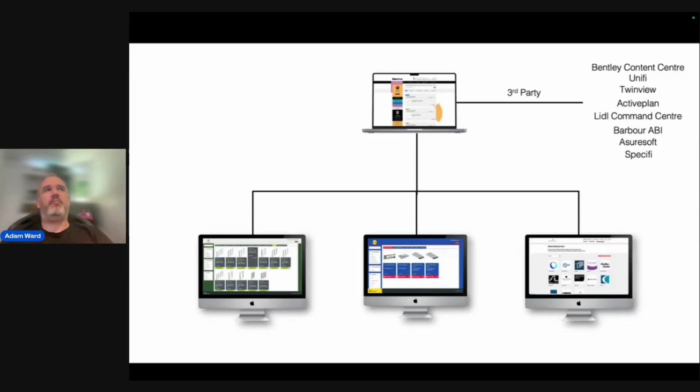We also distribute your content not just on our platform, but push it into other places such as Bentley, Unifi, TwinView, ActivePlan, etc. So we're a distribution platform for manufacturers' content. Update it on BIM Store, and it updates in all these places in one go.

And of course, analytics. As a manufacturer using BIM Store, you get access to all sorts of analytics about who's downloading your objects, search terms, and data about how your products are getting specified. So that's enough about BIM Store.

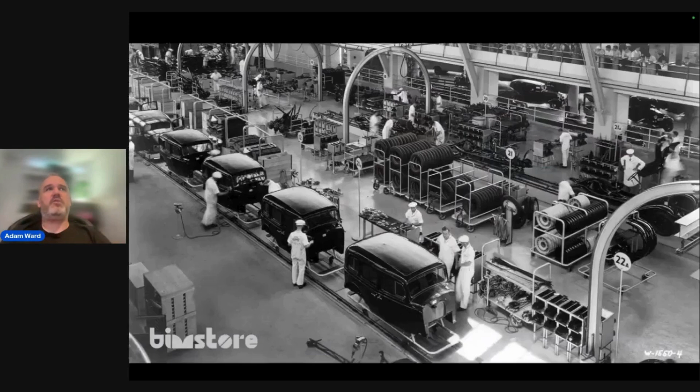I'm now going to move sideways and look at other industries. I'm going to use a couple of clichés here, and I apologize for that in advance, but it's a really good analogy. I think what I'm going to show you at the end of this presentation will circle full back to what I'm about to show you now.

This is the Ford production line, one of the first cars coming off the production line. You can see it's quite automated, well, not automated, but it's the first production line facility for cars, with people building the cars on the line.

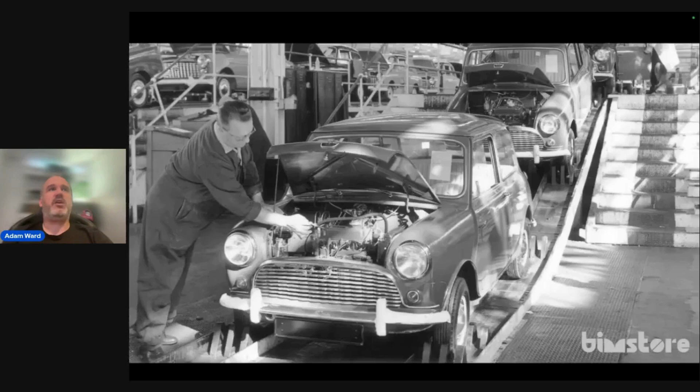This is the Mini coming off the production line back in 1960-ish, I believe, and that was high tech at the time, quite advanced. If we look at how the Mini's produced today, there's no humans on the line. It's completely computer controlled robotics.

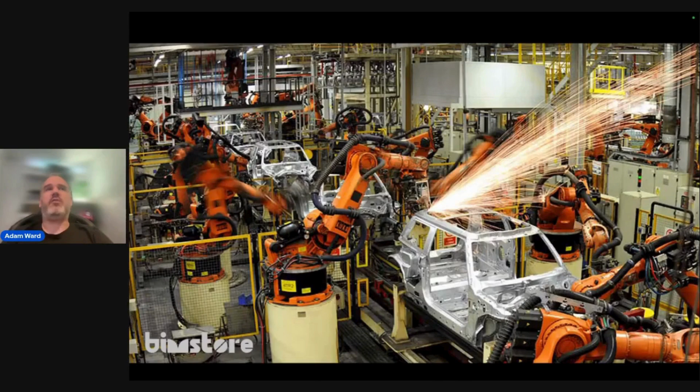Of course, you couldn't do that 20, 30, 40 years ago because you need 3D data. These robots feed off 3D data; you don't work off 2D drawings. You need 3D information to allow them to do this.

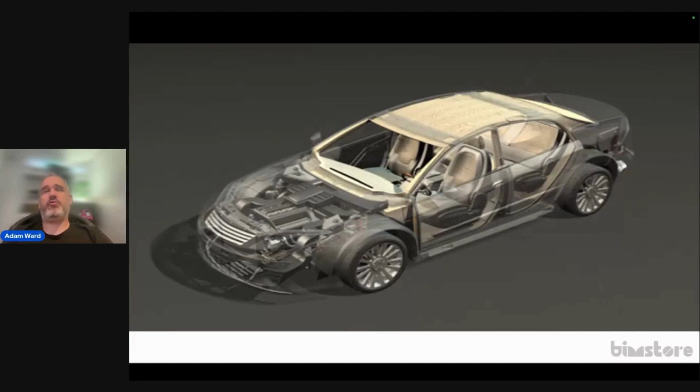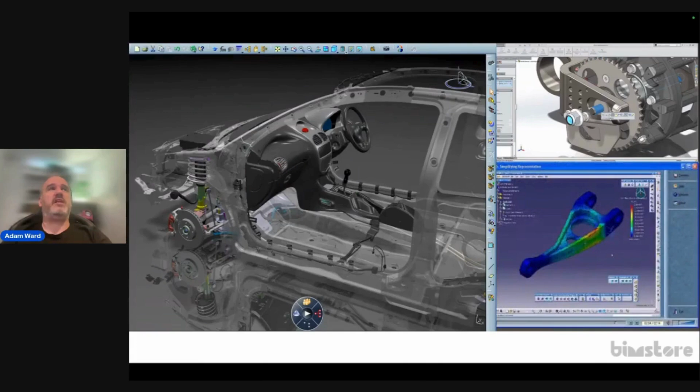We call it BIM; in other industries, they call it digital prototyping. Essentially, somebody like BMW would design a car inside a computer in a bit of software, probably CATIA, designing every nut, bolt, screw, wire, harness, and spark plug. Those parts he would get from their suppliers. So if you've got a Bosch fuel pump in there, it'll actually be that fuel pump that's put into the car to check it fits in the engine bay, and then also do other things like analysis, simulation, and crash testing.

You can crash cars virtually now instead of doing it in the real world, but also use these models for marketing and images. So the images you're seeing on the screen now from Honda are actually the digital prototype, used for fabrication, but they also use those models for advertisements and things like that. You can actually do an advert for a car before you've even built one, because of these digital prototypes, and this is an example of that.

You can have the adverts ready before they've even produced the car, technically. If you look at how cars are operated, like Teslas or any modern vehicle, those cars are sending telemetry data back to headquarters all the time - what speed you're doing, have you went over a speed bump, is there any error codes. That data is getting fed back to the mothership. For example, when I went to get my car serviced, he recommended what tyres to put on it because he analysed my driving style over the last 10,000 miles. That's the type of stuff you can do when you have this kind of connected ecosystem of data.

Oh, I'm going the wrong way.

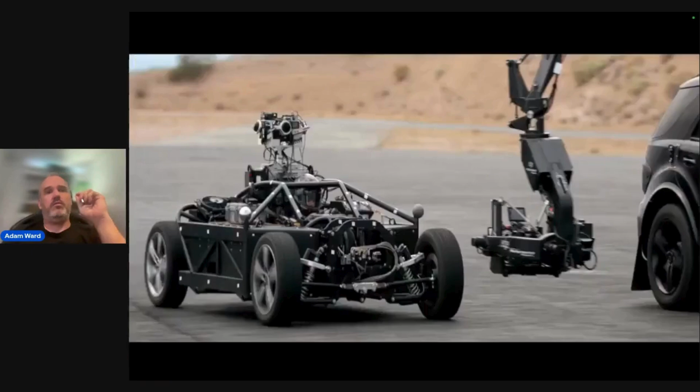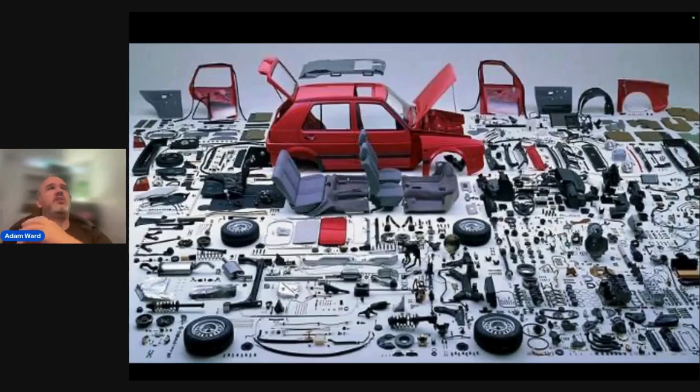And also standardization - looking at BMW Mini, same company, it's the same wheel hub on a BMW Mini as it is on a 1 Series BMW. So by breaking it down into a kit of parts, it's helping manufacturing processes, making it easier. You can start to see how the relationship with BIM and BIM objects comes into here. Essentially building a car as a set of parts from different manufacturers, coming together to build a vehicle. That vehicle can be simulated, tested, rendered, etc.

Another interesting fact, if we look at IKEA, you may not realize, but 75% of all renderings in an IKEA brochure are computer generated. They're not actually real images. 75% of them are computer generated because you can tweak them, you can adjust them.

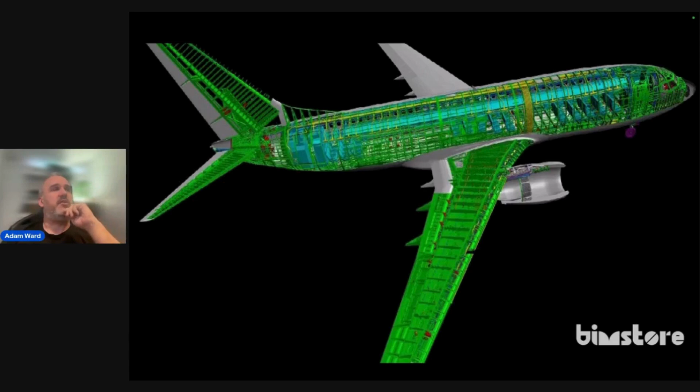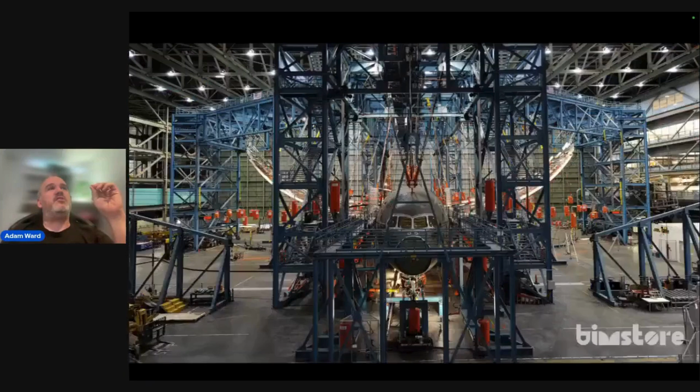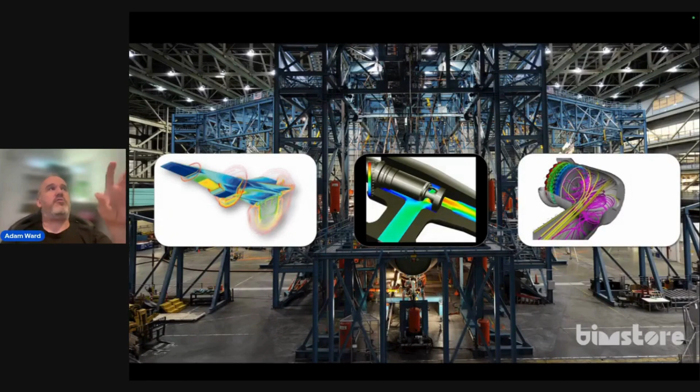So this is a Boeing production line in the factory today. I realise Boeing's probably not the best example at the moment with all the problems they've got. But essentially, this is how they used to test aeroplanes - they used to bend the wings till they snap. Now we've got the computational power and the data from all those tests to be able to do this inside the computer. So CFD simulation and finite element analysis, to understand, hey, let's not go and destroy a 300 million pound aeroplane for a test. Let's test it in a computer and maybe destroy one at the end to validate those results.

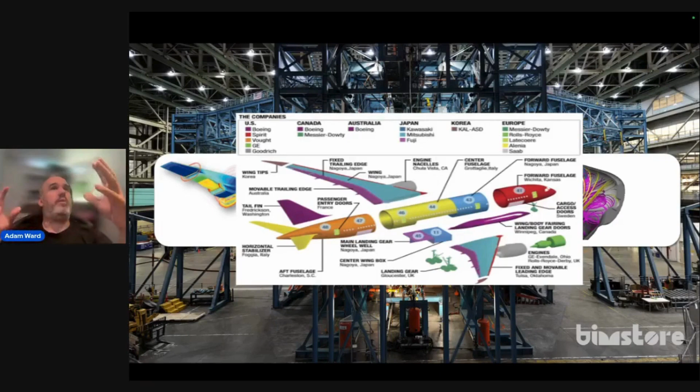And again, because we're building these planes virtually inside a computer, we can build the different parts in different parts of the world by different companies and ship them together, and they all fit together perfectly. Even though in different countries you've got different standards for things like wiring, because it's digitally prototyped in a computer, when it comes together, it all fits together perfectly.

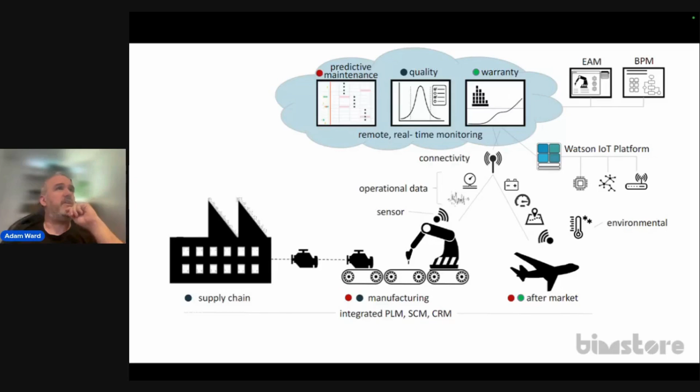And if we look at how aeroplanes are operated, aeroplanes have a highly sophisticated maintenance scheme, and it runs off a bit of software called Maximo. Essentially, every aeroplane in the sky sends telemetry data back to a data center in Birmingham, owned by Boeing. What that's doing is monitoring thousands of sensors on that aeroplane. If it finds any problems, it checks the nearest airport, checks the inventory in that airport to make sure you've got spare parts to service that plane. It'll even redirect that plane to a different airport based off who's on shift, what tools are available, and whether you have spare parts in that airport. And all this happens autonomously on the cloud without any human input. So again, really sophisticated from a PLM, facilities management perspective.

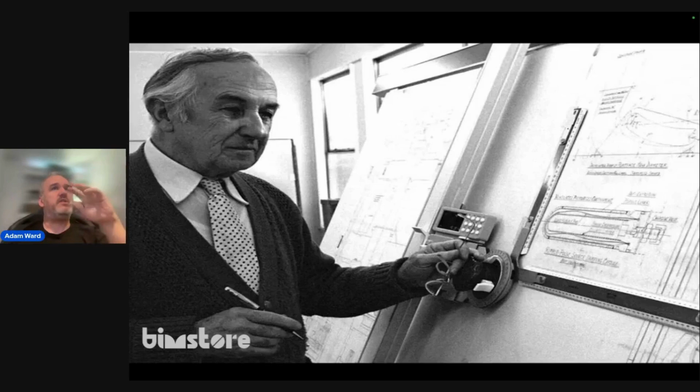Now, if we look at our industry, the construction, architecture, design, AEC industry, this is how we used to design buildings on a drawing board. Some people still do. We moved to CAD, essentially doing what we did on the drawing board, but doing it in 2D - drawing lines, arcs, and circles on a computer screen rather than on a bit of paper. A lot better because you can copy and paste, duplicate things, etc. You don't need to scratch stuff out, but essentially still a manual process. It's not intelligent. It's still 2D information on a screen.

More recently, the latest generation, we're talking about BIM. Now more architects and engineers are designing in 3D, especially for bigger, more complex buildings. We're starting to design buildings like we would design a car or an aeroplane - designing and testing them in a computer.

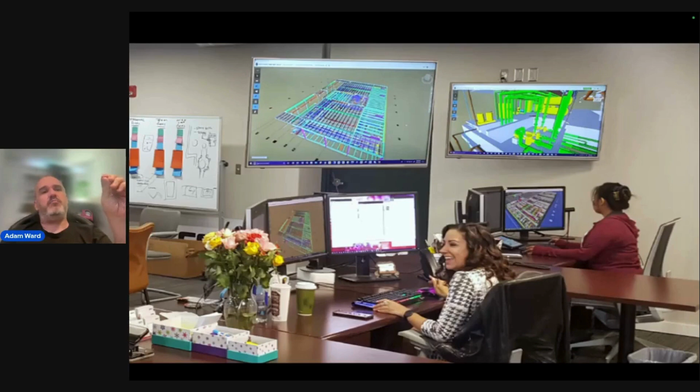If you look at the aerospace or automotive industry, they've been doing that for 20, even 30 years. Everyone thinks BIM's new, but really we're just following the trend of 3D digital prototyping. The reason is buildings are getting more complex and regulations are getting more stringent.

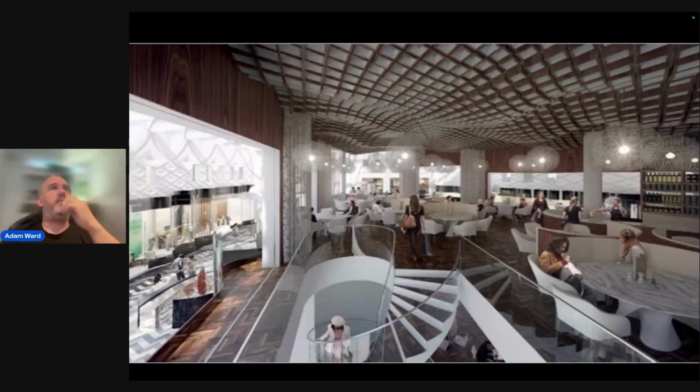This is why digital prototyping, or BIM, is becoming more common, because buildings are getting more complex. This is the inside of that building - again, the architect just went mad: let's not have any straight lines, everything curved and funky.

Even curved glass - this would be really difficult to design in 2D or traditionally, and you can see the complexity. This is the same project, Victoria Gate in Leeds, and you can see this lattice here.

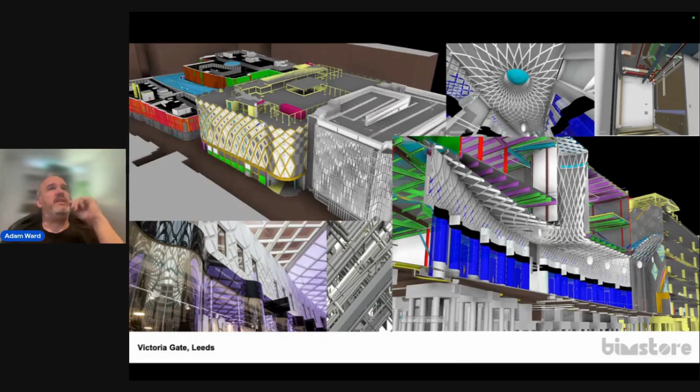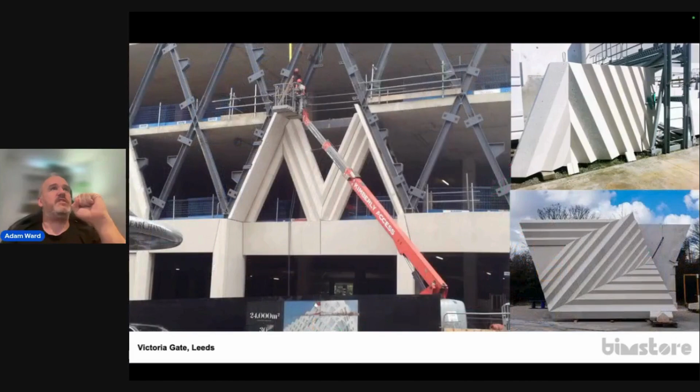Again, it's not just helping the design process, but also when it comes to construction. On site, the contractors need to make sure these things are going to fit together like Lego. For example, these concrete panels are manufactured in Amsterdam, and the steelwork manufactured in the UK in Sheffield. When they both come to site, they've got to fit together with millimeter accuracy - you can see the dowels and holes where the pegs have got to go into.

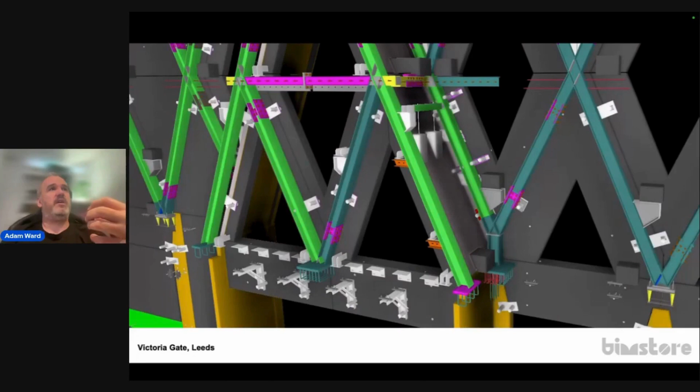Luckily, because of BIM, we can test that virtually in a computer - bring those parts together, and it fits. The drawings are produced from the BIM, so when it goes to site, it should come together perfectly. None of this is really cutting edge - this is kind of how BIM's used today, for coordination, clash detection, etc.

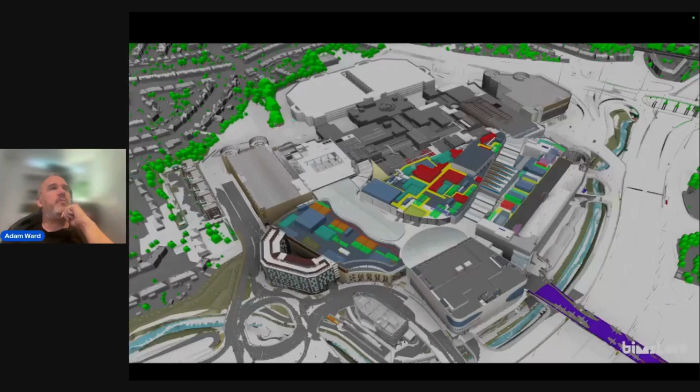4D sequencing, timelining - this is a project in Brent Cross, London shopping centre. This is the 3D rendering, but behind the scenes there's a BIM model. This is the BIM model of Brent Cross.

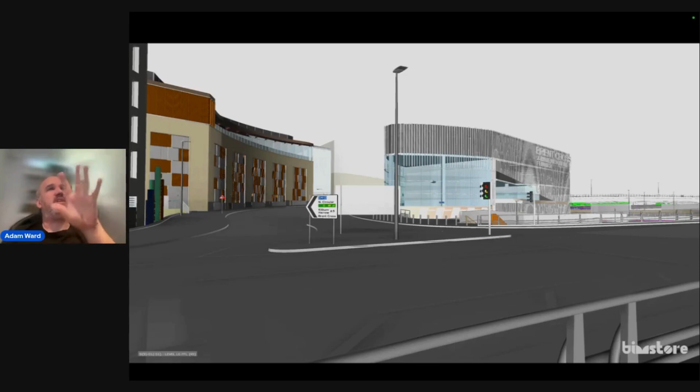And it goes right down to names on the signage - can we check that signage is clear? Can you see it from that angle? Modeling every single part of that building to make sure that it works.

This is Google's King's Cross building - again, this is the building. It's as tall as the Shard, but it's like laid on its edge in King's Cross, London. This is the BIM model inside of Autodesk Revit.

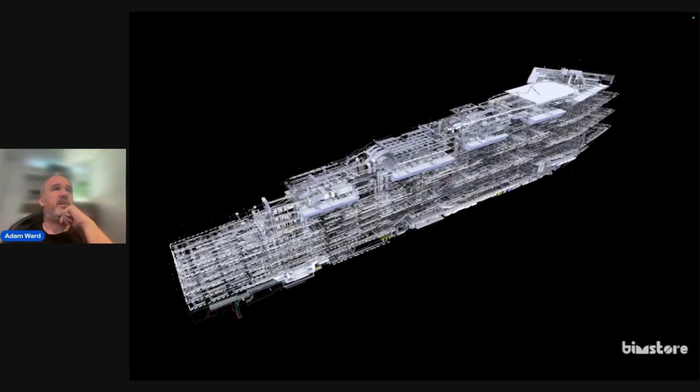You can see the structural model there, built by the structural engineer, and the mechanical model built by the MEP engineer with all the mechanical elements in it, and they all come together. This is the Coal Drops Yard - again, you can see the BIM model on here.

So BIM is used throughout the industry. It's kind of commonplace now, especially in the UK. I can't comment for Australia, but in the UK it's everyday stuff, even for small buildings. So the question is now, how as a manufacturer does this affect you?

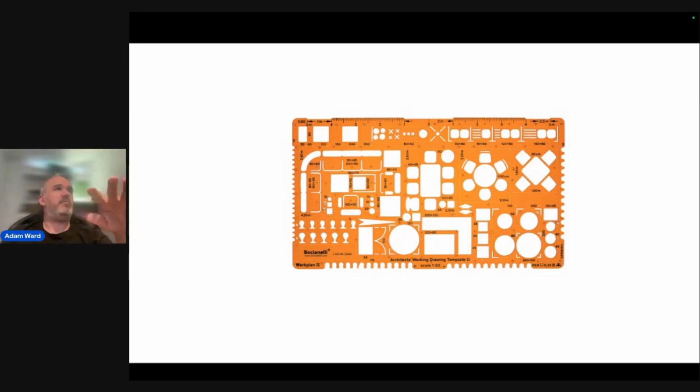In the old days, when we used to do designs in 2D, we used to use stencils. Manufacturers used to issue these stencils to people - Armitage Shanks used to send me a toilet stencil with a little template to trace around.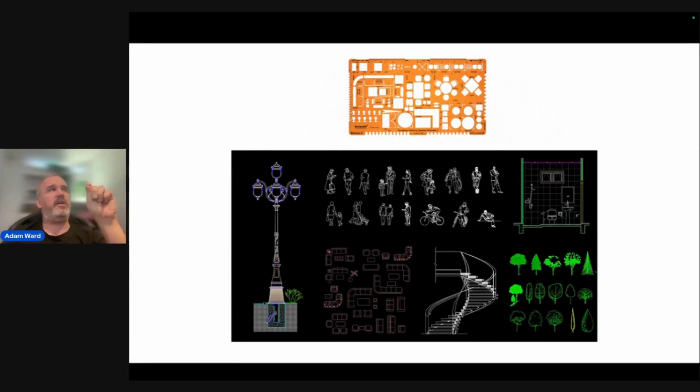Then we moved to CAD, and essentially manufacturers started giving us 2D CAD blocks. So instead of having to trace that furniture or draw that boiler into a CAD, we could just copy a block from the manufacturer and put that directly into the software.

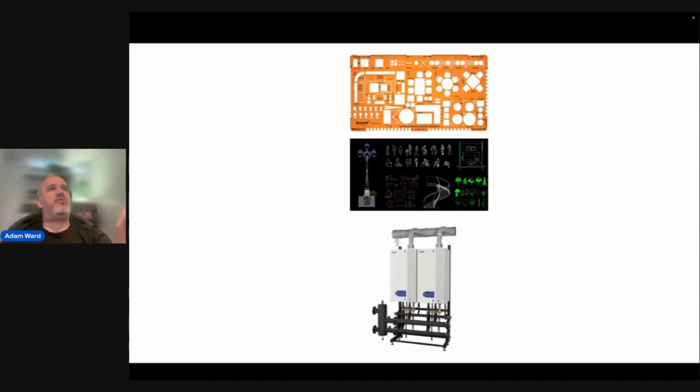With BIM, we've moved to the world of 3D, so we now have 3D BIM objects. But it's more than just a 3D object - obviously this object has data, it's got parametrics in it, so it's configurable. You can have 1 boiler, 2 boilers, different heating outputs, and when you change that, the data updates automatically.

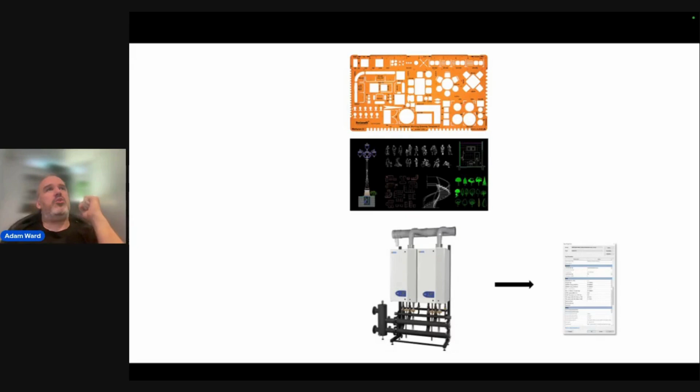But then also it can have nice-to-haves. For example, let's say the architect wants to see if the clearance zone will be achieved - you can have a little tick box to show the clearance zone.

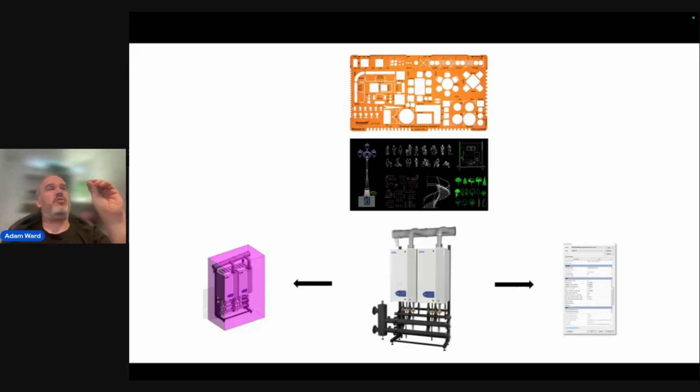As a manufacturer, architects are now expecting manufacturers to provide this content. But it's got to be good quality content, and it's got to be useful content. A 3D CAD block just loaded into a Revit file isn't good - it's got to be good quality, efficient, data-rich content.

Now, this content's also got not just the manufacturer's data, it's got heating information, energy rating, how heavy that is. And you can see on here information which is used to do analysis and calculations.

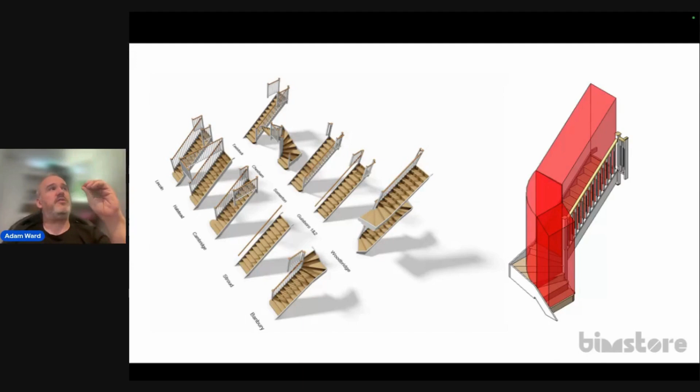You can see manufacturers are now starting to also provide libraries of content. This is a stair manufacturer, Staircraft. You can see built-in clearance zones to make sure you get the headroom. Little features which give the architect incentive to use this content.

This is a roof truss manufacturer providing Barratt Homes standard roof truss designs for all roof trusses. So some manufacturers are now starting to offer a design service in BIM, designing using the BIM software themselves and providing whole packages to contractors and architects.

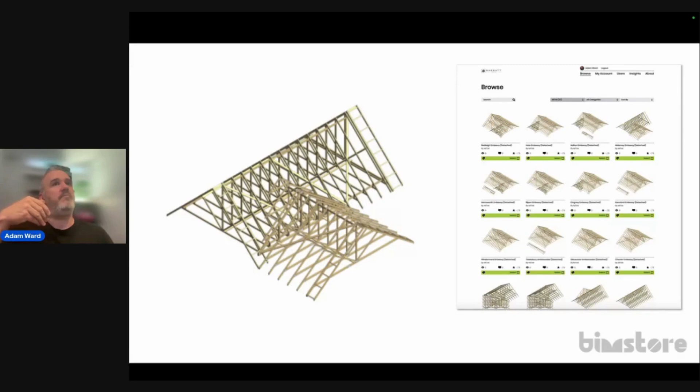For example, I've designed a house, I want a roof truss package. I wouldn't have to sit there placing each truss - manufacturers are now designing those systems. And you'll see on here another one, a library of parts.

A lot of clients, such as Bovis Homes here, who aren't architects or engineers, are now starting to provide libraries of content to their designers. So if I'm designing a new house type range for Bovis, they're giving me the bits to build their houses with, to make sure I don't go mad and specify a gold-plated light switch when they've got a supply agreement with Deta Electrical, for example. So giving architects and engineers the component parts to help build those buildings.

Barratt are doing the same. And I think what's super important here is to make sure that the content that is built is suitable for everybody across the whole life cycle of the project, all the way through from design, all the way through to operation.

If you ask an architect what data should be in a BIM object, most of them won't care about the energy, the heating capacity, the BTU rating of the boiler. They won't care. But if you ask an MEP engineer who has to do the heating calculations, he'll want that data. If you ask somebody who's operating the building, they'll want the warranty information.

So what I would say is that the myth of too much data in a BIM object is a myth - you can't have too much. It's got to be good quality to standards, but really these days with the computers and power we have, more data the better, as long as it meets industry standards.

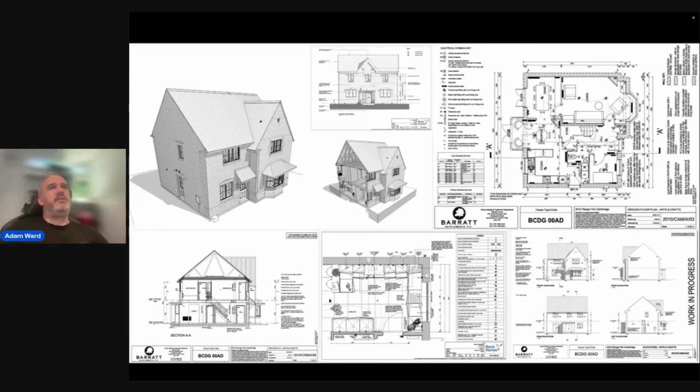Make sure you build content which is used for the whole life cycle, not just design. Again, most architects will be using these objects to build a model which produces all the drawings for them, essentially - the days of producing separate drawings are gone.

But a lot of BIM software, like Revit for example, can also do analysis. And you need to make sure when you're providing your BIM content, it contains the data to allow this to happen. So if you're building a structural beam or column in Revit, make sure it has the right material properties to allow the calculations.

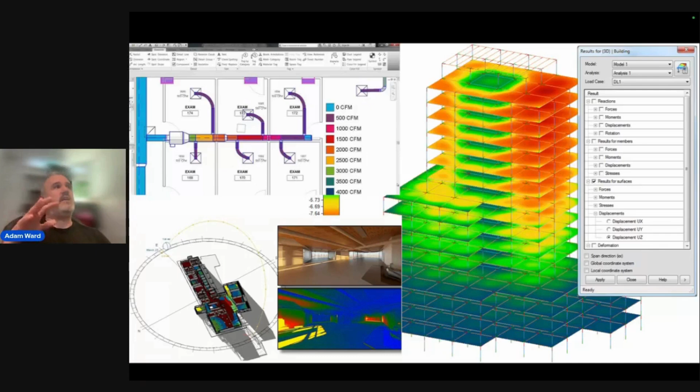Because it can do mechanical flow rates, structural analysis, lighting analysis directly in the design software as the designers are designing - but that's powered by data which is in your objects. You'll see an example of that later.

The other good example is make sure the materials are on your objects, because these are some renderings direct from BIM - these renderings have come from the BIM software itself. Again, making sure your objects have the material on and the correct information on is super important.

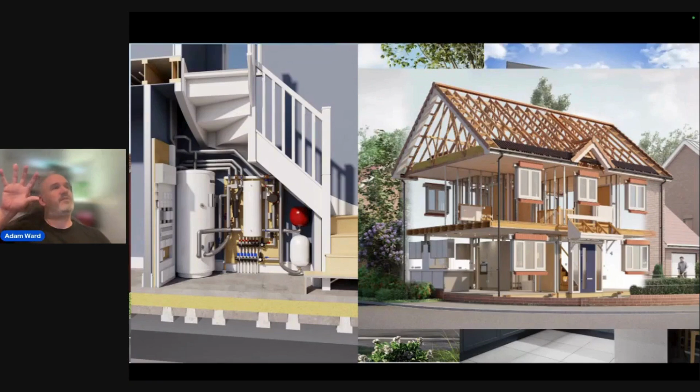This just shows it's not just a pretty box with textures on. If you actually cut a section, you're still getting all that detail, because this model is the same model which produces your 3D visualizations. So you can see the METSEC in there, you can see all the valves and bits in here. And if I clicked on one of those valves, it will have the manufacturer's name, etc.

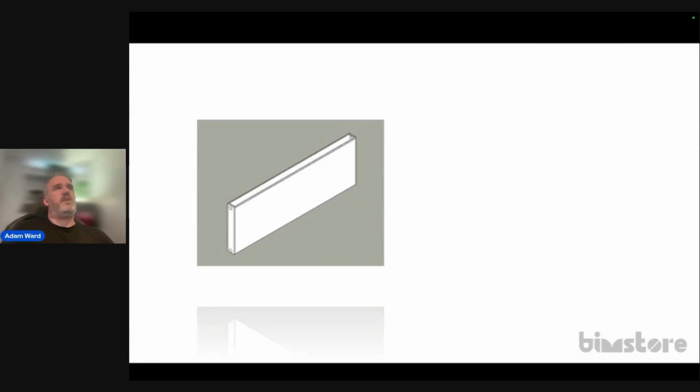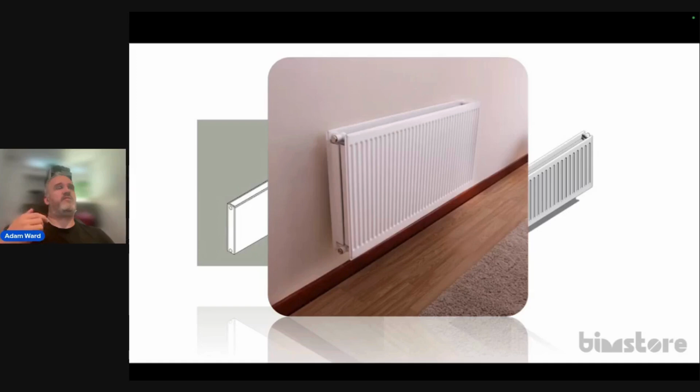So this is a BIM object. Obviously this is in low detail, you have medium detail, then you have fine detail, or LOD, level of detail. There's different levels, depending what country you're in, different standards. But make sure your content's usable for everyone, whether it's for schematic design, you just need a box, or whether it's for detailed design, or whether it's for 3D visualization. Make sure your content has all the data to allow that to happen and is built to standards.

You don't need to go too far. A lot of people say, well, do I need to model the screws and little bits and pieces on there? So I would say these days you don't.

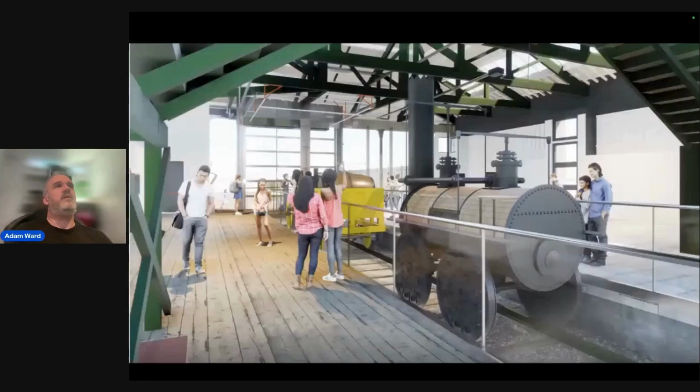Here's another example. So a really basic rendering from Revit. Again, quite bulky, quite washed out. Chucked through a machine learning algorithm, especially if you watch this guy's face here and this guy's face here and this detail up here, you'll see it kind of just adds that next level of realism.

So these days you don't really need to model every nut, bolt and screw, because that's going to kill someone's machine, but build what's appropriate to get the dimensional context across and get the information across.

Obviously, these BIM objects are then also being used in AR. So this is a project which Barratt Homes did. They built the whole house using manufacturer's BIM content, and then a competitor's house. And then at their yearly management conference, they stuck headsets on everyone and said, hey, go and walk around one of our products, one of our houses, go and walk around one of our competitors and do a checklist about why we're better than our competition.

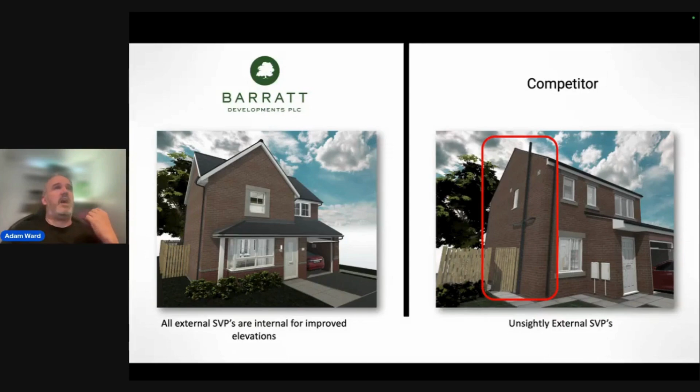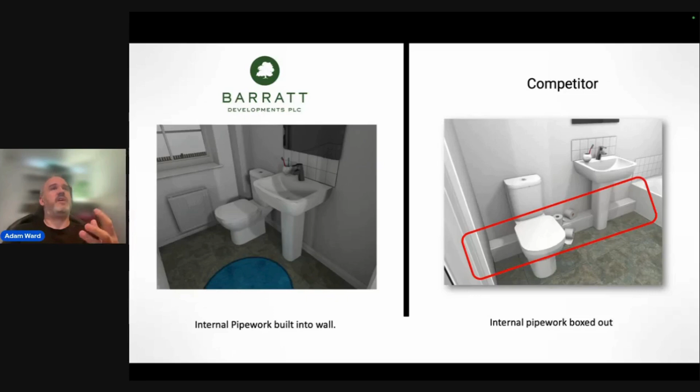So we developed this app for them, BIM Store, which allowed them to do that. And essentially, you could go through using AR or virtual reality with a VR headset and basically spot where the difference is. You can fit a car in the garage, you can't fit it in the other one. Stuff like thinking about furniture locations, etc. So again, VR, once you've got the data with the materials, with the models, this stuff kind of is like a freebie, for want of a better word.

A lot of clients are asking for BIM. So a lot of reason people are doing BIM is because the client's saying, I mandate BIM, I want BIM on this project. And the reason for that is at the end of construction, that BIM model and its data gets handed over to the client, or extracted out in a format like COBie or similar and handed to the client.

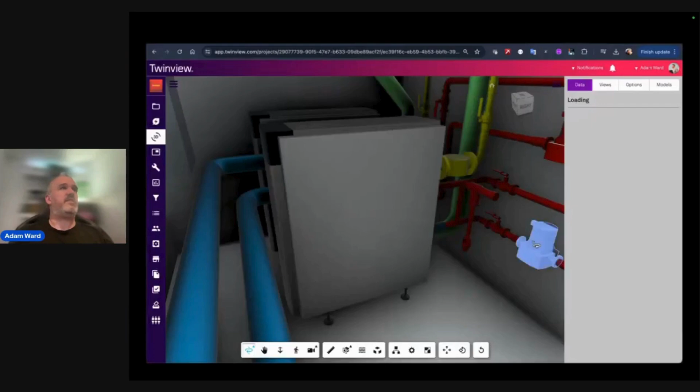But a lot of clients are now starting to use these BIM models themselves for operational purposes. So for example, in the past, we have to have a copy of Revit, which is £8,000, and you need to know how to use that. Now we can set up something like TwinView and allow them to go and actually see that, click on it, get the information. So clicking on a boiler, for example, here, go and click Manage, seeing all the manufacturer's data, the manufacturer, the data, getting access to all the user guides and manuals which are built into the content.

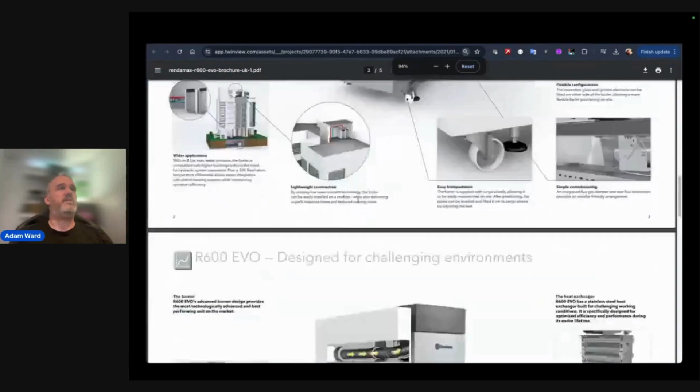So again, this is just like a byproduct at the end, kind of. It's a visual way to see all that data you've put in going back into a digital twin or a CAFM system.

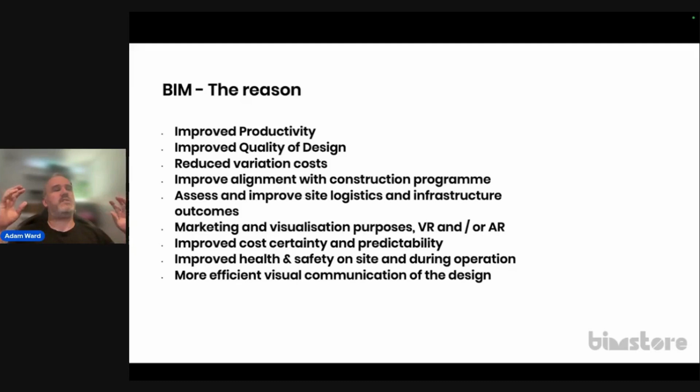So yeah, there's many reasons for BIM, all these reasons here. But really, you've got to think about BIM from the life cycle, from design all the way through to operation. What do people need, and what use cases are these objects going to end up in?

So I'm now going to show you some good examples. Let me talk about Sunbelt. So this is a manufacturer we built BIM content for, Sunbelt Rentals, I think around the world.

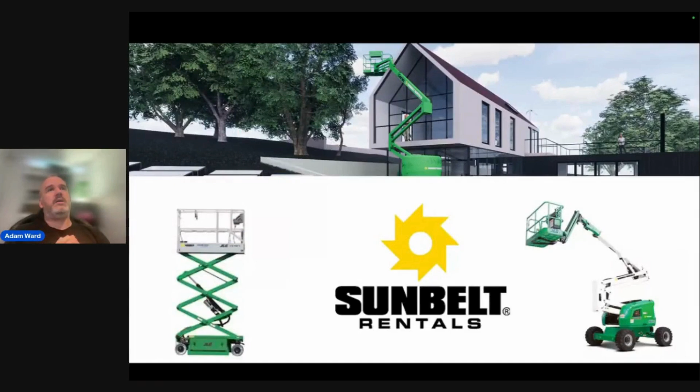Yeah, we built all their content in BIM. We host it for them on BIM Store. So you can see, you can go to BIM Store and download this content. This content's really cool - you can adjust the angles, adjust the lights, extend the booms. It'll have maximum reach built in, turning circles built in, etc.

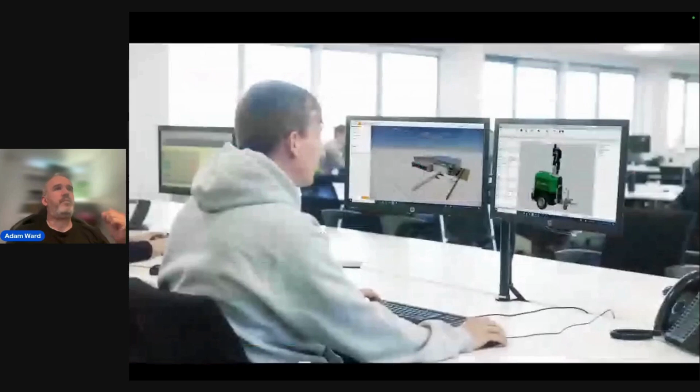Yeah, so I'm going to give you a quick little look at this content. I'm going to show you how they've taken it to the next level.

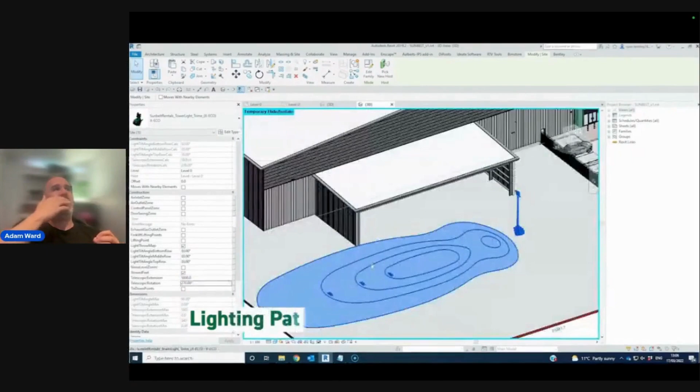So essentially architects can get this content. It's got stuff like, if it's a lighting tower, you can see the extent of the light. You can stretch the content and it automatically adds extra stuff in here. So you can see I can turn on the lighting patterns to see where the light's going to project.

We've modeled the lifting hooks with little markers on, safety zones. So rather than just provide the object in 3D with a bit of data, we've added all these little useful things which make the end use of this product better, including all the accurate lighting definition.

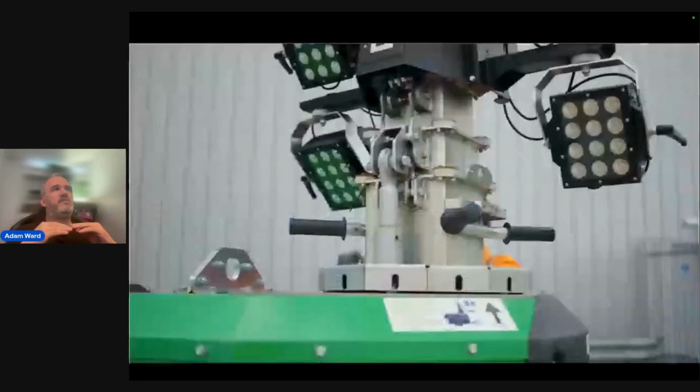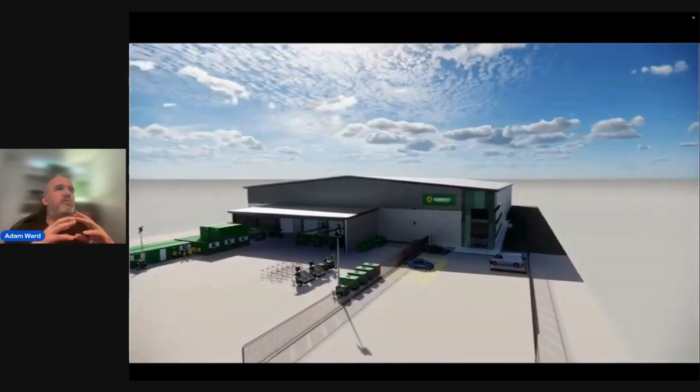So the IES files are loaded in, so you can angle, you can tilt the lights, and it will actually calculate your lux levels based off that. And of course, if you render that in Revit, as you'll see in a second, that will render accurately because it's got that data built in. So really good content that is more than just a 3D object with data - it's got useful things built in to allow you to actually understand, hey, where's my light going to go, etc.

And it can be rendered, obviously.

Now, Sunbelt also use these objects internally because they've got a design business. Let's say you're doing Glastonbury, or a festival or concert - they will design your site, put your barriers around, where your toilets are going to go, where your lighting's going to go, and they'll design that. They've got an internal design team which use Revit, using their own content to actually provide this service. So you're not just providing this content to third-party specifiers, you're also using them yourselves to form part of a design service.

And because they had all this content built, you thought, hey, let's stick it in an AR app. So we built them with BIM Store - we've built them an augmented reality app, which you can go and download from the App Store now if you're in the UK, and it'll allow you to place the object on site, see all the data, see the documentation, but actually put that on your site and see will it fit. So if you want to clean your gutters, for example, you can go and place that object in and see if that device will actually reach.

So again, another use case where before you could have built that up separately - that was a lot cheaper, a lot more efficient because we already had BIM with the data in to do that. We'd already modeled the clearance zones, the lifting capacities, the 3D objects, so really easy to do that based off that data. So another advantage of where it's not just about BIM for design and construction - that BIM data is also being used for other purposes to help them market and sell their products.

But essentially, on your website, you go on, you design your house. So you pick a standard 3-bedroom, 2-bedroom. You go on, you can change your bricks, your colours. You want render, you change your front door, you want solar panels, you want chimneys. You can go right into the detail of which type of heating system you want. And again, this is all built using real manufacturer's content, which I'll show you in a second.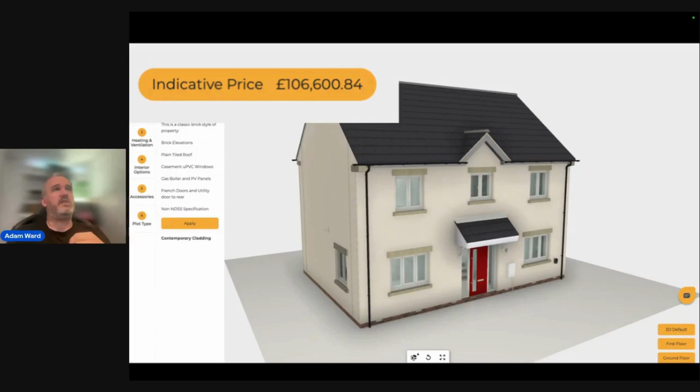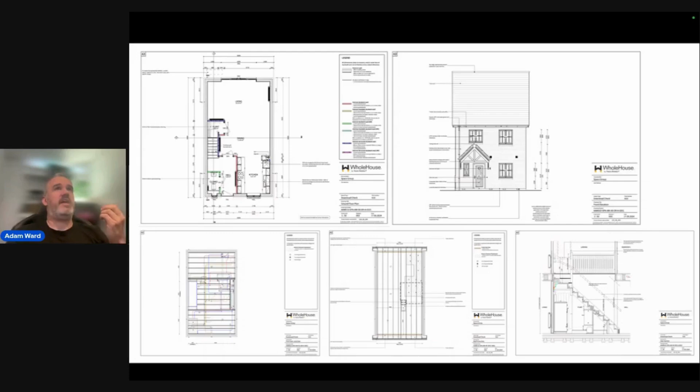Like staircases, door handles, you can go and design your house and it'll give you a real-time price based off their back-of-house pricing system. Then you can put that on a site, pick a site location, click order construction pack, press buy, and about £1,000 later, 20 minutes later, you have a full set of construction drawings exactly as per you configured.

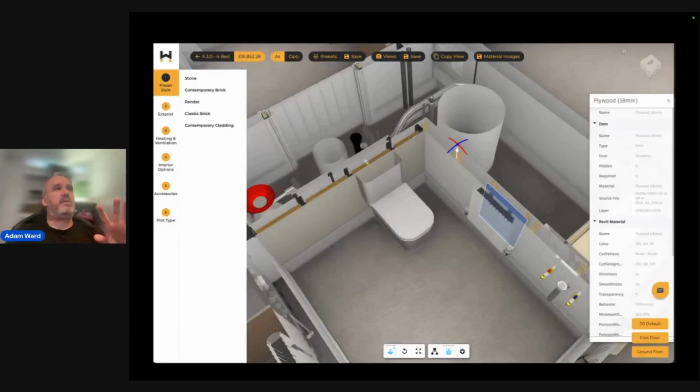These are true construction drawings with sections, plumbing diagrams, and everything is exactly as per you configured, all without a human touching it. Not only does it do all your construction drawings in detail, it also gives you a full bill of materials with what products, what parts, how many you need, etc.

Then you can walk into any Travis Perkins and call off those items with basically a guaranteed price for a house after 20 minutes. The really clever bit is, as you're configuring that house, behind the scenes is a really detailed BIM model. You can see even when you move a radiator or add a radiator, it's putting the timber in behind the scenes to allow for that.

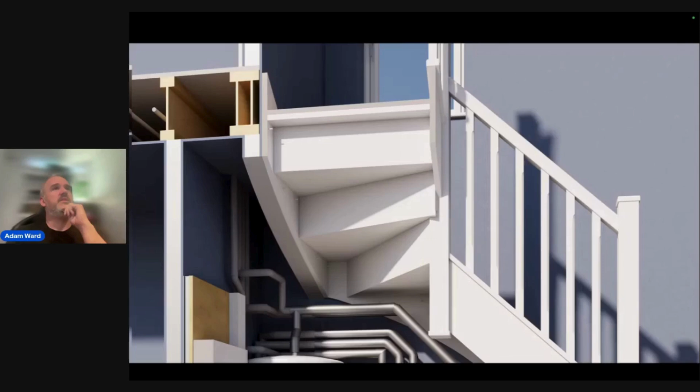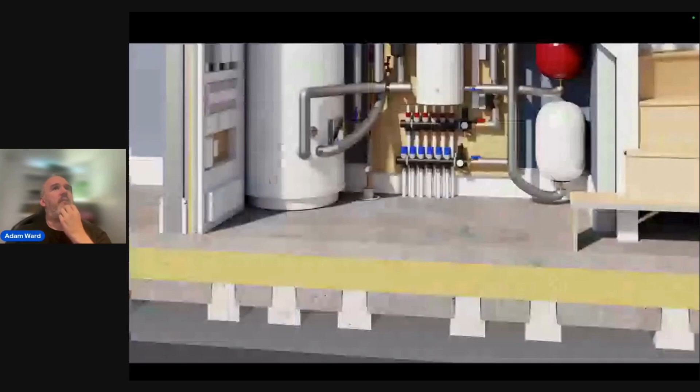So right down to that level of information, you can see some of the detail here. It's not just a 3D image, it is a full-on BIM model being configured, right down to the detail, and that's used for renderings and stuff as well.

The really cool thing is we thought, well, wouldn't it be cool if we could work with a company like Top Hat where we could drive robots in the factory? This is how Top Hat used to build buildings, essentially humans building buildings inside a shed and then shipping them to site on the back of a truck. This is called Factory One. The problem was, designing a house took longer than it did to build the house.

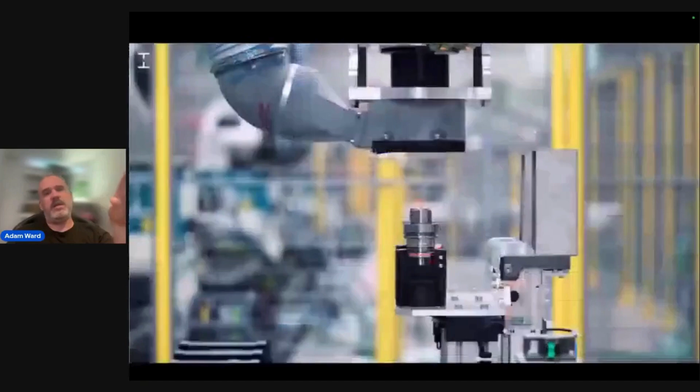You could build a house in a day, but it took 2 weeks to design the house. So we used our Da Vinci platform to actually allow someone to configure a house exactly like you've just seen on Whole House, press a button, and that data gets converted to G-code and a lot of other clever things, and that then goes and drives robotics in Top Hat's factory.

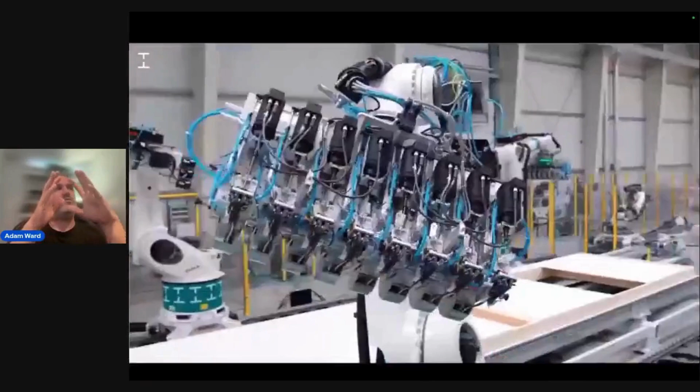So the idea is you can go from computer screen order all the way through to a house coming out of your factory in less than a day, all without any human input. This is only possible when you've got that 3D data.

If you look at the car example, how cars are now being made by robots, you can see how we've come full circle. We're getting to the point now where if you've got really data-rich, controlled BIM data, you can use that to drive fabrication a lot easier, optimizing that construction process.

So I think I'll leave it there. That gives you an overview of where BIM is today, where it's cutting edge, where it's being used, more than just, hey, here's some objects for an architect to stick in the model, and showing how that's being used by a couple of different manufacturers and customers. So yeah, I don't know if there's any questions.

You're muted, Tyrone.

Gotcha. Thanks for that, amazing. Thanks, Adam, I hadn't seen too much about Whole House, that's pretty amazing. A question came in right as you were talking about it, I'll start with that one. How customizable are the Whole House designs? I think that probably means like can you move rooms around and things like that.